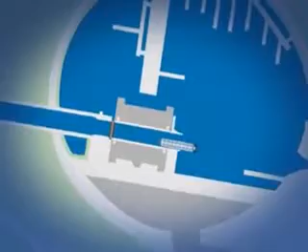The boat moves into a gondola, which holds boats side by side. There are two gondolas on the Falkirk Wheel, which always weigh the same, whether or not they carry their combined capacity of 600 tons, as the water contained within the gondolas is displaced to compensate.

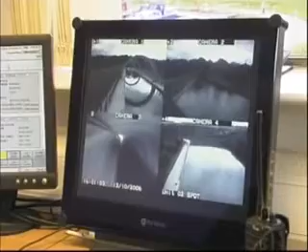The Falkirk Wheel is under the operation of the main control room at the basin, and safety procedures are closely monitored to ensure that the wheel cannot turn until all the steps required have taken place.

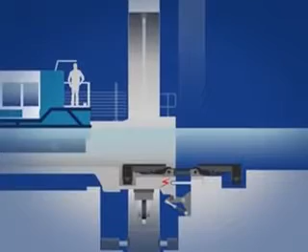To make the Falkirk Wheel ready to turn, two hydraulic steel gates are raised to seal off the gondola from the water in the canal basin.

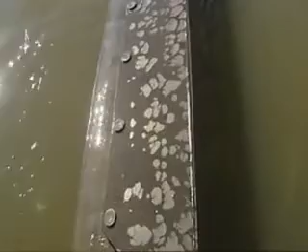The water between the gates is then pumped out, and a watertight seal which connects the gondola and the canal basin is removed. A hydraulic clamp and a series of securing pins, which prevent the arms of the wheel from moving while the gondola is docked, are now removed, allowing the Falkirk Wheel to turn.

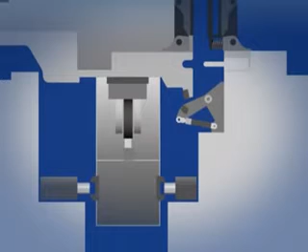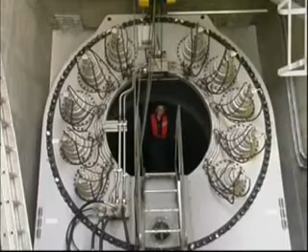In the central machine room, an array of 10 hydraulic motors begins to rotate a central axle, which is carried on bearings at both ends.

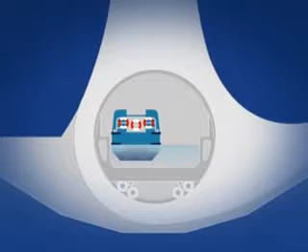The axle connects to the outer arms of the Falkirk Wheel, and this now begins to rotate slowly at a speed of 1/8 of a revolution per minute. It takes around 4 minutes for the gondola to reach the top of the aqueduct, 25 metres above.

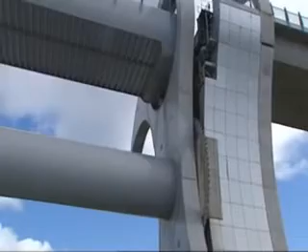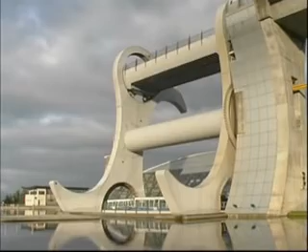The Falkirk Wheel can turn in a clockwise or anti-clockwise direction, and the choice over which way it turns is made by an operator in the control room. To reduce wear on bearings and other moving parts, the operator will evenly distribute the number of times the wheel turns in each direction.

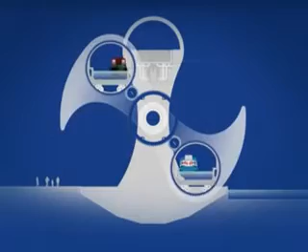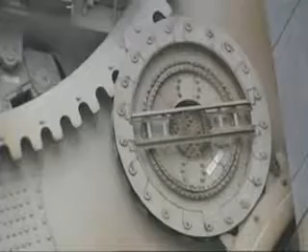As the wheel rotates, the two gondolas are always kept in the upright position by a simple system of gears. Two 8-metre wide outer rings orbit a fixed inner cog of the same width. Two smaller cogs connect the inner and outer rings together. These travel in the opposite direction to the outer rings, and this ensures that the two gondolas remain level. Without this system, the inertia created by over 80,000 gallons of water would tip each gondola over.

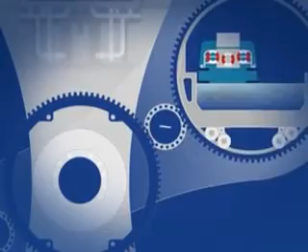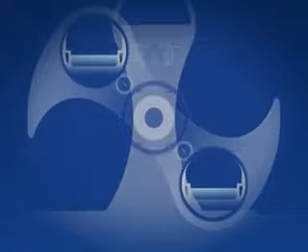According to Archimedes' principle, floating objects displace their own weight in water. So when a boat enters the gondola, the weight of water displaced will equal the weight of the boat. This means that one gondola holding one or more boats will always weigh the same as an empty gondola, providing that the water levels are the same.

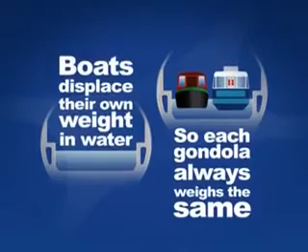Maintaining an equal water level in each gondola is critical to the operation of the wheel. A system of electronic sensors constantly monitors the water levels up and down the Falkirk Wheel site.

Balance and equilibrium are the two principles behind the Falkirk Wheel's remarkable energy efficiency. It uses only 1.5 kilowatt-hours of energy to complete one half-turn, the equivalent of boiling 8 electric kettles.

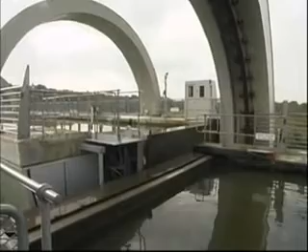Unlike a conventional lock gate, the Falkirk Wheel makes very economical use of water. Because water has to travel both up and down with the gondola, the canal water is never wasted.

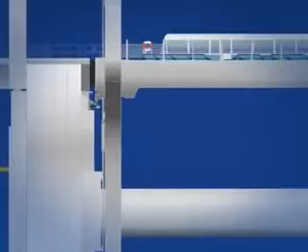When the gondola reaches the top of the aqueduct, a hydraulic clamp locks onto the gondola to hold it in place, while the space between the gates is filled with water.

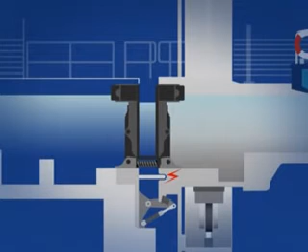Once the water levels have equalised, the gates are then lowered to allow the boat to pass through.